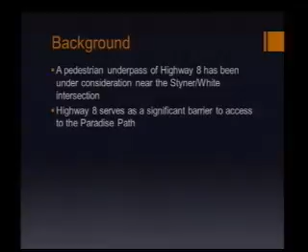So, as you mentioned, this is a topic that's been under discussion for some time, which is the consideration of a potential pedestrian bicycle underpass of Highway 8 near the Styner and White Avenue intersection with Highway 8. Highway 8 serves as a significant barrier to access to the larger portion of the Paradise Path located south of Highway 8.

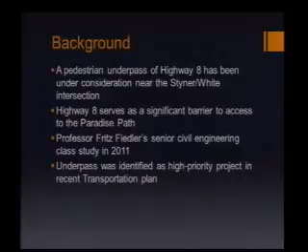There was a class project that was completed in 2011 that looked at this potential underpass, concluded it was feasible based upon the students' work, and provided some preliminary cost estimates that we did feel needed to be verified by professional engineers. This underpass was identified as a high priority project in the recent Moscow on the Move transportation plan, as well as the number one priority for the Paradise Path task force.

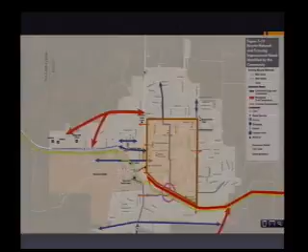That location was identified at Styner and White as somewhat centrally located to that developed area between Mountain View and downtown, with the existing bridge structure providing a separated grade crossing for the pathway facility. This crossing improvement was identified in the transportation plan as a high priority project for the Paradise Path Task Force.

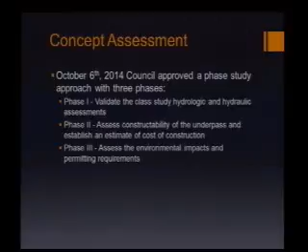On October 6th of last year, the council approved a phased study approach with three phases. Phase 1 was to validate the hydrologic and hydraulic assessments to ensure no flooding impacts in the area. Phase 2 was to assess constructability and develop a concept design and cost estimate for the underpass. Phase 3 was to assess environmental impacts and permitting requirements, primarily related to wetland disturbances that may occur during construction. Terragraphics Engineering was selected to conduct that assessment.

In November of last year, staff brought forward the Phase 1 findings that concluded there were no adverse flood impacts from the proposed underpass. At that point, council approved moving forward with Phases 2 and 3, and today's report concludes those items.

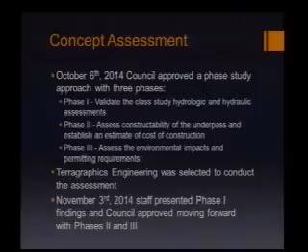For the Phase 1 assessment, as a reminder, the study indicated the pathway would have no adverse flood impacts during flood events. There's a table in the memo showing both current upstream and downstream flood elevations with the proposed underpass structure.

There are some fairly minor impacts on low-level events at the 2 to 10-year event level. Once you get into the higher level events, where floodwaters have reached the pathway surface and additional conveyance is available, you'll see that for the 50 and 100-year events there is essentially no impact between pre- and post-project conditions.

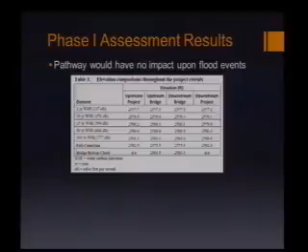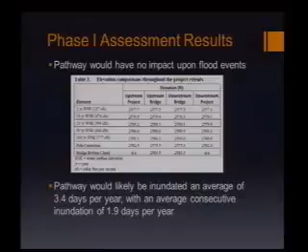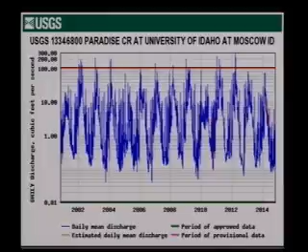You can see the spring typically has higher flow events during the spring runoff time period. In those instances where the flow rate exceeds it, the elevations would overtop the pathway, causing some temporary short-term closures, but that occurs during time periods of the year generally with less pedestrian and bicycle activity due to weather conditions.

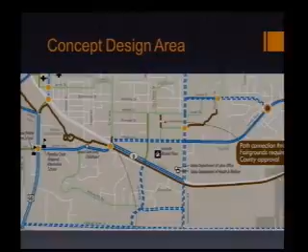As we looked at the concept design for the underpass, we also looked at the surrounding area and the plan underneath the transportation plan for circulation.

There are north-south sections of Paradise Path that run from Mountain View Park past Good Samaritan, a section along the north edge of the Joseph Street Ballfield project, a new pathway along the east edge of the Ballfield project connecting with Meadow, and the Heron's Hideout segment that comes over to Mountain View, opposite the fairgrounds property.

The intent was for a crossing at that point through the fairgrounds down south, then moving on over to this crossing point here at Styner and White.

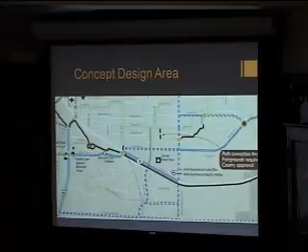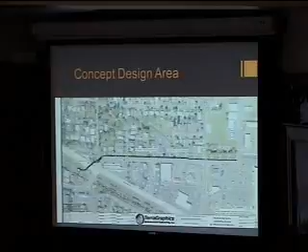When we looked at the overall project area, we focused on the path here to the fairground entryway. This is shown as the scope of the project included in the study, picking up at the fairgrounds entry drive and continuing on to the intersection with the Paradise Path located on the south side of Highway 8.

Looking at more detail, all included in the packet, this is the proposed underpass concept alignment. You can see the vertical alignment with the elevation of the crossing underneath through the bridge structure, and then 8% grades coming up and out to match the existing grade elevations on both sides of the crossing location.

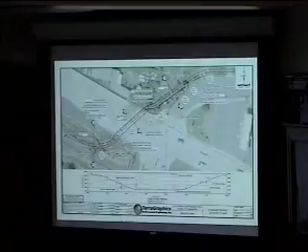It's designed as a 10-foot wide pathway. Looking at more detail, there are section details showing the concrete retaining wall underneath the bridge structure and the approaches on the downstream side moving out from underneath the bridge structure, and on the uphill side as you come up to White, there are some slopes that need to be retained to match the existing grade of the roadway on the White Avenue side of the intersection.

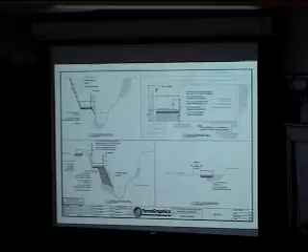There's a cost estimate that you can't read on the screen, but it's also included in the packet. Largely, the base project is shown at $285,000, if I recall correctly.

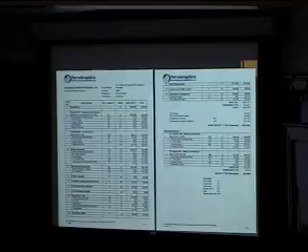That is the cost to extend from Hanson Avenue, which is the first intersection they reach east of the bridgeway. That was the shorter option, if you wanted to curtail the project down. That intersection location is where a crossing could be placed and a pedestrian drop to cross White Avenue over to the existing sidewalk on the south, providing an opportunity for pedestrians and cyclists approaching from the east to gain access and go all the way down underneath the bridge structure and crossing.

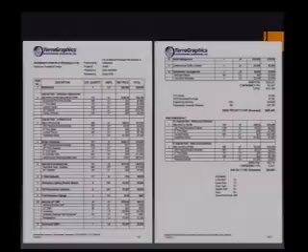There's an additional $60,000 estimate of cost to continue that pathway from Hanson to the Fairgrounds intersection. So the total project was approximately $345,000 in total cost to do sidewalk improvements and separated pathway construction from the Fairgrounds driveway to the crossing and tying into Paradise Path.

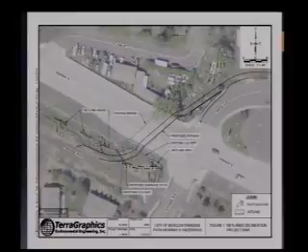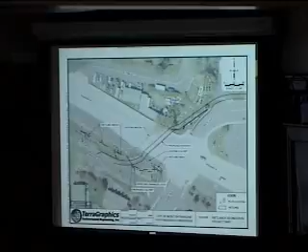We also conducted a wetland delineation. There were just a few small minor areas of wetlands delineated within the anticipated disturbed area of the project, largely located on the south side of Highway 8, where an existing culvert crossing was going to have to be relocated in a small area of wetlands. The area of disturbance was much less than 1/10 of an acre, so there would be no wetland mitigation required as part of the project.

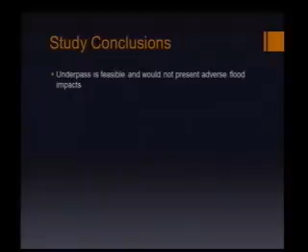So to summarize some of the conclusions from the study, it did indicate the underpass is feasible and would not present any adverse flood impacts. It does indicate that the pathway would be inundated approximately 3.4 days per year.

Today being one of them. I don't know if today—I haven't looked at the flow. There's a lot of water out there right now. Yeah, I don't know what the current flow rate is right now at the gauge station.

I could probably take a look and see if by tomorrow we could give you an indication of what that level is. But it is that 100 CFS at the downstream gauge station at Perimeter Drive that would be the typical elevation where you'd see that inundation, generally for short duration, approximately 2 days per year. TerraGraphics reviewed all the historical gauge data and concluded the longest period of inundation on record was about 11 days over the 100 CFS number, but on average it would be about 2 days per year. And looking at the graph, in the last 2 years it would not have been inundated during those records.

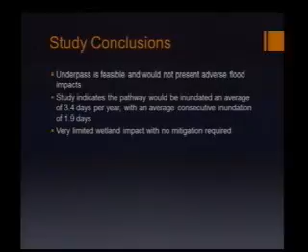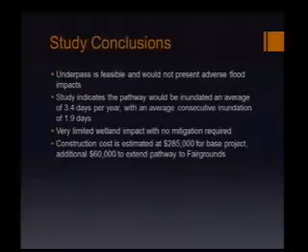There is very limited wetland impact, and there would be no wetland mitigation required as part of the project. The construction cost estimate is $285,000 for the underpass and base approaches, and then $60,000 to extend that pathway to the Fairgrounds property.

Finally, as staff looks at this, it appears the project would be a good candidate for the Idaho Community Choices grant program. That grant program is the one funding the pedestrian improvements at the middle school, which was a little over $480,000 project, or in that $400,000 range.

What would be the potential grant money available for that? These projects are up to $500,000 under the Community Choices program, with a 7.64% minimum match. So if you were to do the total project between the base and the additional pathway, that's approximately $26,000 for the required minimum match. Obviously, any additional match that can be provided can make the application more competitive.

With the—you mentioned that very limited wetland impact—who is that? Were the wetlands designated by the feds, by the state, or by the city?

TerraGraphics has a wetland delineation expert who actually visited the site, did all the survey, and identified the areas, and did soil tests to identify what wetland areas would need to be mitigated. We had that delineation performed, and any grant-funded project will have to have that delineation, so we have that completed. It's under the jurisdiction of the Corps of Engineers, who administer the wetland program, but the delineation for this project was done by TerraGraphics with their wetland experts.

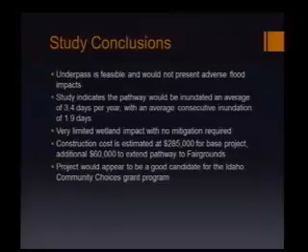So that's all staff has at the moment on this project, and happy to hear any comments that the committee may have.

Well, I'm glad to see things are moving forward so briskly, and for a project that's high in priority for both Paradise Path/Pathways people and the City Council, it's good to see progress. For my point, I'd like to receive the report and say go forth and look into the grant funding possibilities for it. I think bringing it forward as a regular item on the City Council agenda is the way to go for a project this high in profile, so that everybody can be on the same page with it.

John? I pretty much agree with Art. When you mentioned the funding possibilities, I didn't hear you say anything about a match. Okay, 7.64% is the minimum match, so for the $345,000 project, that would equate to a little over $26,000 for match. Over probably the year that it would take to put it in or whatever.

Correct. And I think at this point, the next round of funding for community choices is for FY18 that begins in, I think, July of 17 for the state. Okay. So it's several years out, that would allow time for the city to accumulate funding for that match. Sounds good to me. I agree with Art. Let's put it on the regular agenda so we can all get a crack at hearing about this again. I think the work that's been done has been done very well, very quickly, and very reasonably.

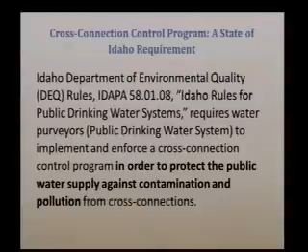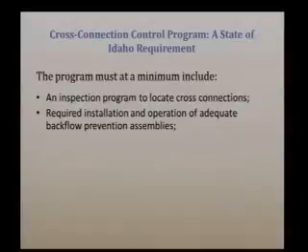The program must include, at a minimum, an inspection program requiring the installation and adequate operation of backflow prevention assemblies, and annual testing and inspection of those installed assemblies. We're required to discontinue water service where suitable protection is not provided. And in the case that an assembly does fail the required test, it must be repaired, replaced, or isolated within 10 business days. And that's something that we addressed last year.

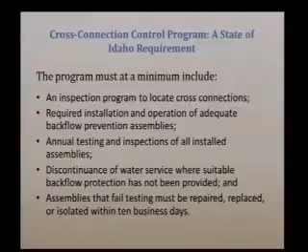Now, for example, you're talking here about businesses, hospitals, residences, everything? Correct. Anywhere where a backflow assembly is required to be installed must follow all of these rules and requirements.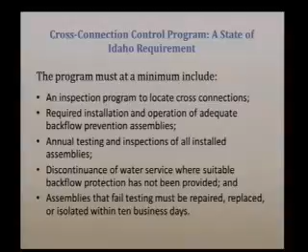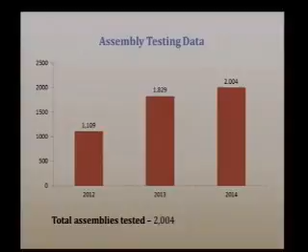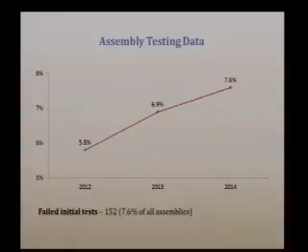Notifications: 1,066 were sent for the first notices, and that's before the due date. After that, a second notice is sent as a reminder that the date has come and passed. 255, and then only 28 of the third and final notices. So this decrease that we're seeing here, I think, is not unexpected, and that's due to the consistently enforced program. People know that it's coming and that it's going to happen, and irrigation systems are often tested when they're started up in the spring before their due date comes. So that helps with not needing those second and third notices, as people have gotten used to it and just have it scheduled. It's just done. So we expect this trend to kind of continue, but as more assemblies come, we'll see where those numbers end up. But it's good to see those.

You talked about your third notices and how many you sent out. How many systems did you have to disconnect that never... We did not have to disconnect any. I worked very hard to make sure that doesn't happen. Phone calls, site visits, giving people more time if it's needed. That's not what we want to do. The goal is to protect the water supply, not to shut off people's water.

So thank you for that. Oh, you bet. No one wants to be the bad guy.

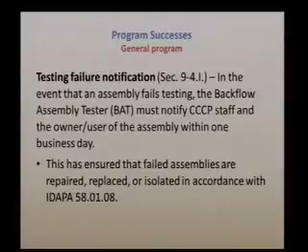Excuse me. I jumped ahead of myself there.

So here's where we talked about the assemblies being tagged, and that's where we can easily tell whether an assembly's been tested or not. That's been great, and the BATs have done a great job of that with very little resistance, and everyone's been really happy. That's also helped cut down on duplicate tests where someone has called and asked for a couple quotes from testers, which happened a couple times in 2013, and that was all but eliminated in 2014. They can go and see that it was tested and say, thanks for calling, but it's already been taken care of.

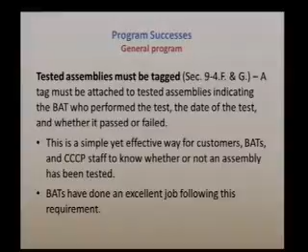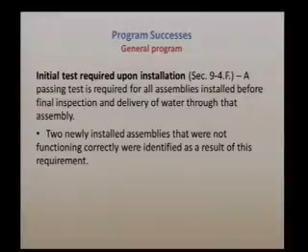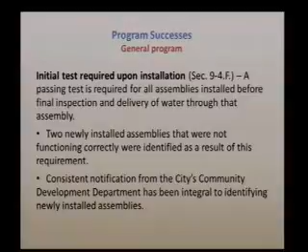Initial test required upon installation, Section 9-4F. Upon installation, it is required that assemblies be tested to make sure that they are actually working. In 2014, there were 2 newly installed assemblies that did fail that initial test, and then were either cleaned or repaired as needed. And consistent notification from the Community Development Department has been extremely important to that. Leora Farai and Justin Goodwin have done a great job of helping us out there for newly installed assemblies. So thank you to them.

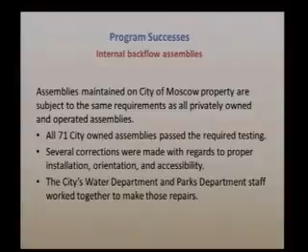The internal backflow assemblies, that's all city-owned assemblies, have to follow the same requirements as all privately owned assemblies. There are 71 throughout the city, and all of those passed the required testing. We made several corrections with regards to installation, orientation, and accessibility in case they need to be repaired. And the Water Department and Parks Department staff worked together fantastically on that. Mike Parker and Wes Peterson from the Water Department have done a great job. And the Parks Department staff, Scott Carlson and Jim Allen, and I know there were other guys that would hop in with a shovel when they would see our staff doing things, and they've worked great together, so that's been really nice.

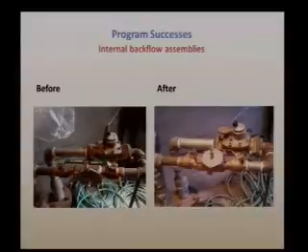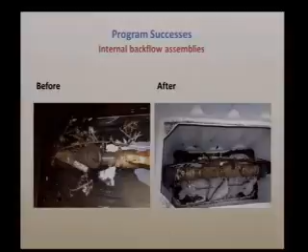Here's just an example here. The one on the left, this is an orientation issue. It's twisted about its axis, and the manufacturer's guidelines say that it has to be upright, as you see on the right here. So that was a fairly easy correction, but nonetheless one that needed to be done. This one is a little bit easier to see why the correction needed to be made. Assemblies are not supposed to be submerged. This one we thought was groundwater seeping into the box there. It actually turned out it was a leak, so we identified a leak and cleaned that up. You can also see the one on the left is rusted, and that's part of the reason we don't want those submerged. A new assembly was installed that's actually a better fit here.

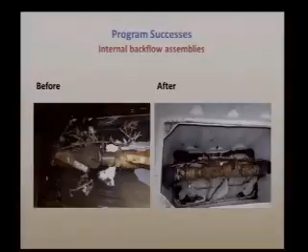If you can see the two different checks, and I'm not sure which one's the laser pointer here. Thank you. There's one here on the top, that's the first check, and there's another one that's submerged on the bottom. So if that needed repaired, that's extremely difficult to get to. This one has both checks with top access, so a much better situation there.

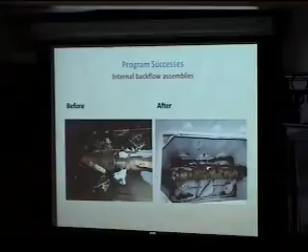What does one of those cost? That one right there, I believe, is 1.5 inches, and that's going to be in the 150 to 225 range, depending on the assembly. So there's a range, but most of them that you'll see throughout the city are going to be not much bigger than that. So $100 to $250 is a fair range. And that charge is absorbed by the customer? That's correct.

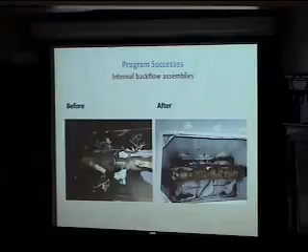Some of the reasons those other ones can be missed include change of ownership, tracking down a new owner who didn't get the notification, or someone being out of town or on sabbatical. I've come across a lot of those things. Sometimes people forget, and sometimes people just don't want to comply. So those are some of the challenges we come across.

In general, the backflow assembly testers we work with do a great job. The number one problem comes from submitting backflow assembly tests that are passed. As I said, failed assemblies are notified really quickly because it's codified that they have to be.

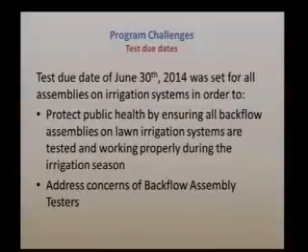Test due dates were an issue. For 2014, a test due date of June 30th was set for all irrigation assemblies. The number one reason for that was to protect public health, ensuring the backflow assemblies on lawn irrigation systems were working during the time they're in use, during the irrigation season, which typically starts in June. Additionally, there were concerns from backflow assembly testers about test due dates in the fall, since there's a conflict with them winterizing systems.

The change we made was based on Section 9-3A of Title 7, Chapter 9, which states that the Public Works Director or designee shall adopt rules and regulations as necessary to carry out the provisions of the chapter. This was challenged by one customer whose date was changed. That one had previously been set as a due date in August, and that was moved forward. There are others who had due dates in April or May who were moved the other way.

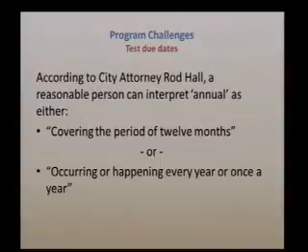That customer challenged the change, so it was discussed with City Attorney Rod Hall. He indicated that any reasonable person could interpret 'annual' as either meaning covering a period of 12 months — in this case August to August — or occurring once a year or every year. Since both are reasonable and common definitions of the term, and it was not explicitly stated in code that the city has the authority to set or modify a due date, customers were allowed to retain the due date from the previous year if they requested, with some as late in the year as August 31st.

Why is this a problem? Well, number one, assemblies can be used for the entire irrigation season while in a failed state and then tested right before being shut down, which really does not protect the system. It puts the water supply at risk, and the main reason for this is that most irrigation system assemblies are located outdoors. They're exposed to freezing temperatures throughout the winter, which can damage the assembly, either the internal parts or sometimes the whole assembly. I've seen them crack completely open.

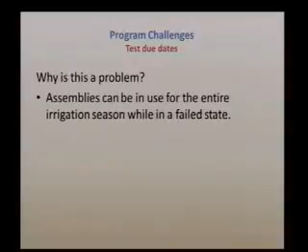Those same freezing temperatures and winterization efforts by contractors in the fall make it difficult to schedule testing. If it's 5 degrees out, which did happen in November, that can make it really tough to get the test done, and at that time they're in the thick of their winterization processes. Many of the testers I talked to said they would prefer not to have to worry about tests at that time.

It can happen that an irrigation system is winterized before the test is performed, and that does not relieve the requirement that the test has to be performed — it says it has to be tested annually, every year. This did happen twice this year, and customers had to incur extra costs to have the system recharged so they could test it, and then winterized again, which is unfortunate.

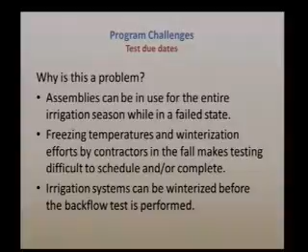Also, assemblies that are not irrigation systems, with a due date near the end of the year, don't have the same buffer as those in the middle of the year if there are scheduling difficulties, errors, or omissions. Especially for fire suppression or fire sprinkler systems, there are additional licensure rules, and the only companies with both licensures are out of Spokane, so those are more costly, especially with a rush charge to get from Spokane to Moscow. By either definition of annual, they have to be tested by December 31st, or water service can be disconnected.

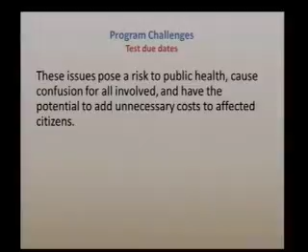Because of those reasons—the risk to public health, some of the confusion, different due dates, and the potential for unnecessary costs for citizens—staff is planning to propose to City Council a legislative amendment to Title VII, Chapter 9, that allows the city to set and modify test due dates.

So before I move on to that, are there any questions about the report?

Other than irrigation and fire suppression, what are some other examples where backflows are needed? Boilers require reduced pressure because of the pressure they build, and that water can become stagnant. Soda machines require that too. Buildings over 30 feet tall above the water face, because that can cause pressure as water gains height. Laboratories, hospitals—anywhere there's a serious potential for chemical or biological contamination.

I'm fairly sure that when you talk to a customer, you inform them that the city is under the same restrictions—so it's not one of those things we have to do but you don't. Oh, sure. Yeah, that's been a point of emphasis for me, to make sure all city assemblies are in fantastic working order.

That's something that would be really bad if it happened and it came on our end. I wouldn't feel very good about that.

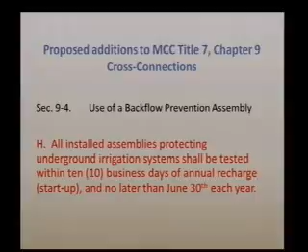Section I would require all other installed assemblies—non-irrigation system assemblies—to be tested no later than September 30th of each year, giving us that buffer we talked about, not running up against the end of the year. Section J would give the Public Works Director or designee the authority to set and modify due dates by which assemblies required by the chapter must be completed. After that, everything would be bumped down to K, L, M, which are already standing.

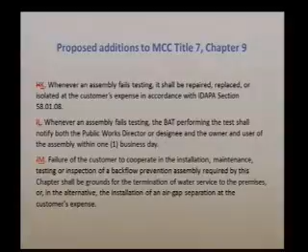Are there any questions about those? That's all. That's a good report. Well, thanks. Good job. Thank you, Ty.

I appreciate that. I'll go ahead and finish up here and give you the staff recommendations. Staff recommends that the committee accept the Cross Connection Control Program report and forward the proposed additions to Moscow City Code, Title VII, Chapter 9, to the full City Council with a recommendation for approval.

Now, are there any questions? That's it, I promise. Well, do you have anything else? No, I know more about backflow and the reasons for them than I ever have, and so when people come to me complaining, I probably won't make them any happier, but I can give them more accurate answers as to why they're needed, and they're going to continually be needed, and we're going to continually test, and if they don't think their neighbor is in compliance, give you a call.

Absolutely. And if they're not sure if they're in compliance, have them give me a call. I have had a couple people that called me up and said, I don't know if I'm protected, and that was great. That was people wanting on their own to follow the rules and to make sure that they're not a part of the problem.

Now here's a question for you. In front of my house last winter before last, the water line broke, and the city came in and fixed it. At that time, do they also test the backflow?